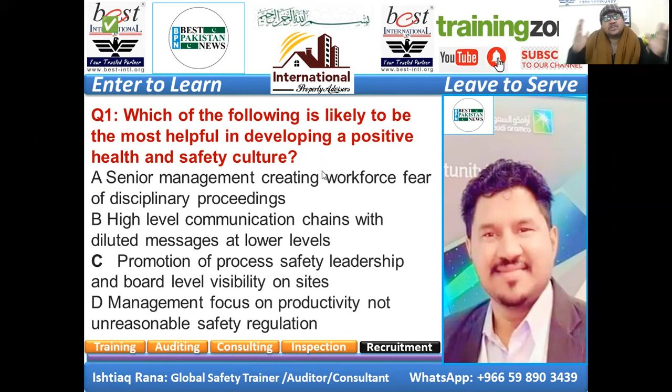Now let's take another example, question number 2. Since it's a mock exam, it gives an idea how that exam would look like. Question number 2 is, process safety involves a commitment to continuous what? Impartiality? No, it doesn't look sound. Improvement? Yes, we can think about it. Improvisation or implementation? The biggest room in the world is the room for further improvement.

So the ultimate purpose of process safety involves a commitment to continuous improvement. It's not like today everything is good and next day it's all bad. Or overnight you improved 70% your process safety, but very next day it came down to 20%. So it's not like that, it's a continuous, effective, continuous improvement process.

The improvement process is, today you are at 5%, then 7, 9, 11, 20, 22, 25, and you're maintaining, right? And this is how you go and keep your continuous improvement process on a daily basis, inshallah. So that is the ultimate purpose of this process safety management system.

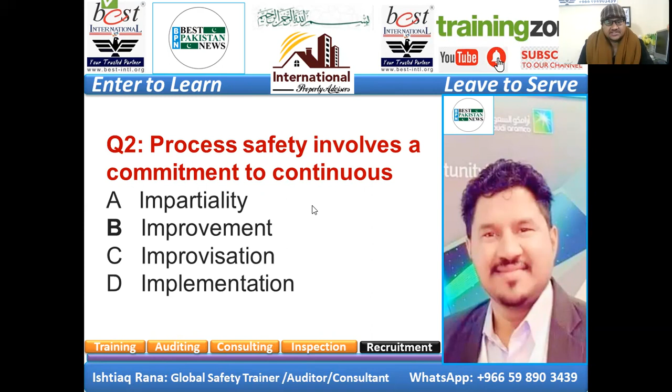Let's take another example. Question number 3, which of the following best describes workplace consultation? Now, we have communication and we have consultation. We have informing someone or consulting someone. So they're giving 4 options. Option A is two-way exchange of information between employer and worker. Yes, that's kind of consultation, because you have to exchange information as an employer along with your workers, right? So A is the right option.

Now I'm just going to talk about the right option, inshallah, so we can save some time. Ultimately, time is money, right?

Question number 4, what is the main reason for sharing lessons learned from major incidents with other organizations? The right option is C, accident investigations are more effective in determining immediate and root causes, so that we can take corrective preventive actions and avoid any repetition of such incidents in future, God forbid.

Question number 5, the key elements of process safety management follow the plan, do, check, act model, PDCA, as per international standards. Whenever we talk about management standards, PDCA is a foundational tool, plan, do, check, act model will be integrated with that management concept. Now, the management review aligns with which part of the model? Act, because management review relates to act, like plan, do, check, act.

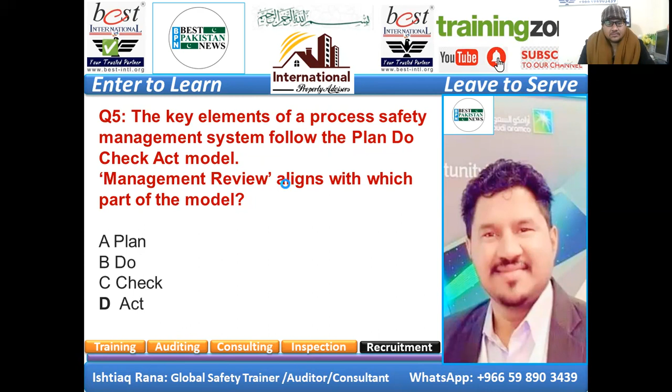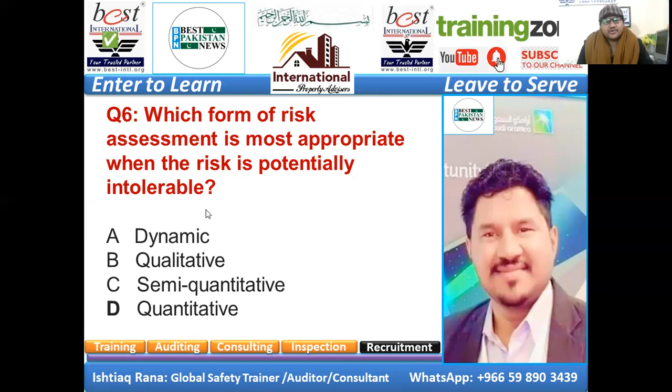Question number 6, which form of risk assessment is most appropriate when the risk is potentially intolerable? So we have to do quantitative risk assessment here. We can't rely only on qualitative.

Question number 7, which of the following is a leading indicator? In advance, you are getting data and defining your safety indicators, like through your safety audits. Of course, in advance, proactively, you'll be getting plenty of insights on what areas need to be focused on and how you're going to improve, right? So A is the right option.

Question number 8, which of the following is most likely to help you develop a safe system of work? You do task analysis, actually, not data analysis or causal analysis or statistical analysis. All analysis, of course, have plenty of benefits. But when we talk about process safety, it's a game of each task, each activity, each step of that particular process or sub-process. You have to take it seriously, because one small mistake and it's all over. So, task analysis.

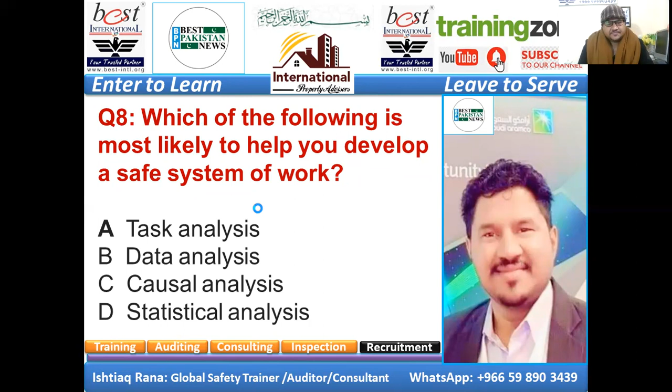Question number 9: a permit to work is usually required in preparation for an activity with high risk. Mostly, the permit to work system needs to be designed, applied, and implemented, especially to control high risk activities or processes.

Question number 10: the main reason why a shift handover should be given as much time as necessary is to allow for option B, an incoming operator to ask questions about the status of the process and an outgoing operator to clarify and explain. On rig sites there are normally 2 shifts, but there could be 3 also. So whenever you hand over your shift, the incoming operator should ask plenty of questions and clarify what went wrong, what was okay, and any complicated processes or contractual works going on.

Anything related to that particular shift needs to be communicated as output to the upcoming or incoming operator.

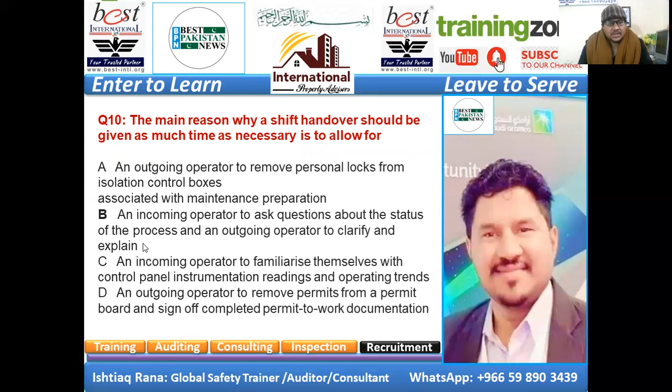Question number 11: inspecting a workplace where contract workers are carrying out work is performance monitoring. It's quite straightforward - it's not active monitoring, not reactive monitoring, not condition monitoring. This is called performance monitoring, because you awarded them the contract and they are working on your behalf, serving you basically, so you surely need to monitor their performance here. So D is the right option.

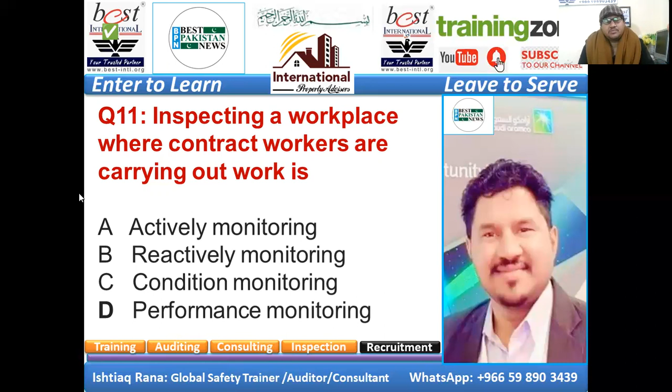Question number 12: maintenance work is planned on plant A. Understand the deep meaning of this question technically - maintenance work is planned on plant A, and the work is likely to impact on the operation of a second plant B. What is the most effective way of controlling risk between the two plants in this situation?

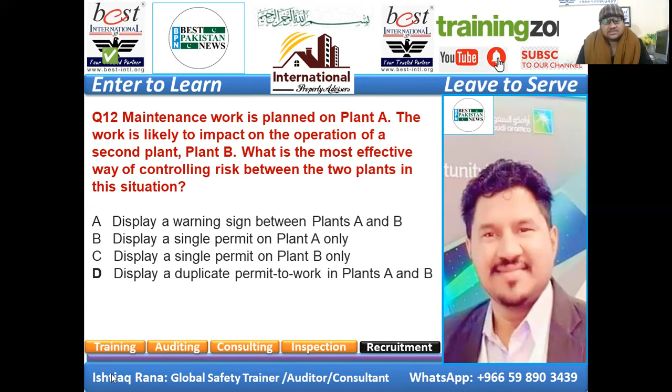Maintenance work is planned on plant A, and the work is likely to impact on the operation of a second plant B. So what is the most effective way of controlling risk between the two plants in this situation? The much better approach is to display a duplicate permit to work in plants A and B. So D is the right option.

Question number 13: what is normally included in the periodic review of the safety performance of contractors working on site? What is the real answer - how periodically we have to do inspection to check compliance and accident review meetings.

This is the best way - you inspect and check compliance as per your standards, as per legal regulations, as per process industry standards for that particular process, since you're getting services from your contractor. So this is the best strategy: inspections to check compliance and accident review meetings.

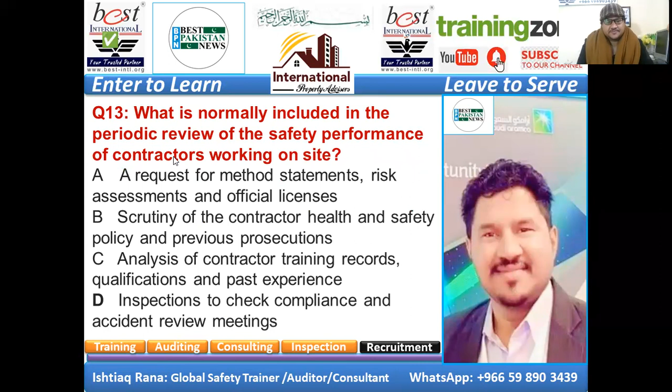Question number 14: maintenance of bunds primarily contributes to what? Emergency preparedness. Maintenance of bunds primarily contributes to emergency preparedness. In advance, you are getting ready and making sure that if anything still goes wrong, these bunds definitely will be a great contributor to keep you secure.

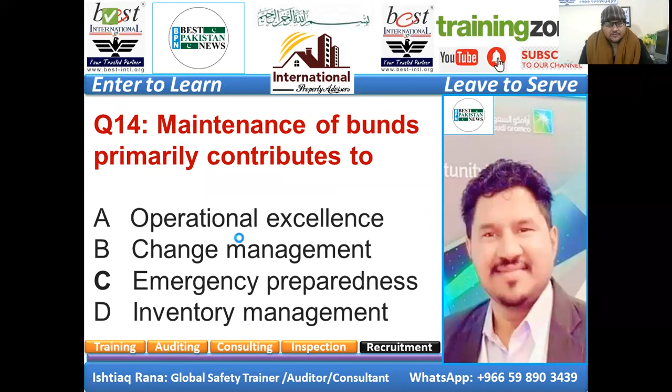Question number 15: a process was shut down automatically due to an unexpected and sudden pressure increase, outside of standard operating conditions. What type of shutdown is that an example of? A process was shut down automatically - a sudden shutdown due to an unexpected and sudden pressure increase, outside of standard operating conditions.

Outside of SOC, standard operating conditions. So what type of shutdown is that an example of? Of course, it's an emergency shutdown. So D is the right answer.

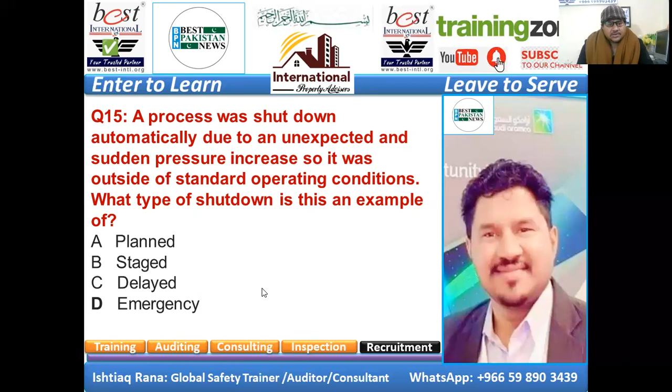Question number 16: safe operating envelope, SOE, involves adhering to what? Upper and lower operating limits. There are of course process parameters for each process, several of them, so make sure the upper and lower operating limits are well followed. Like if you go and see the oil refineries or gas oil separation plants, or any high hazardous industries, see how that plant is being controlled.

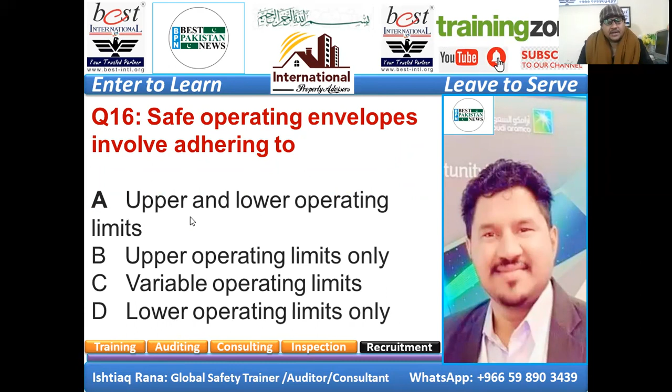There are plenty of upper and lower operating limits which need to be followed process to process, to control that plant and avoid any sort of abnormal or emergency situations. So this safe operating envelope involves adhering to upper and lower operating limits. So A is the right answer.

Question number 17: pressure, temperature, flow, level, pH, and density are common parameters associated with safe operating envelopes, as I mentioned earlier. So C is the right answer.

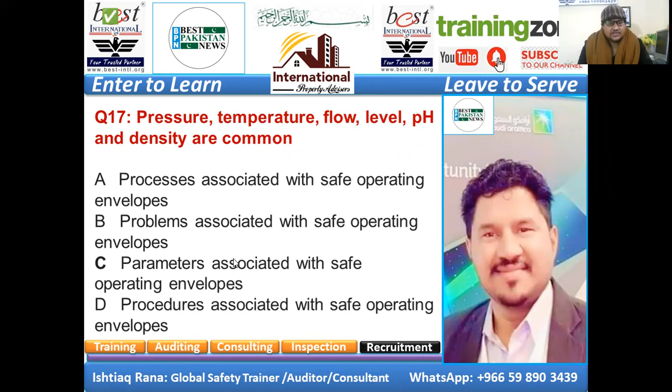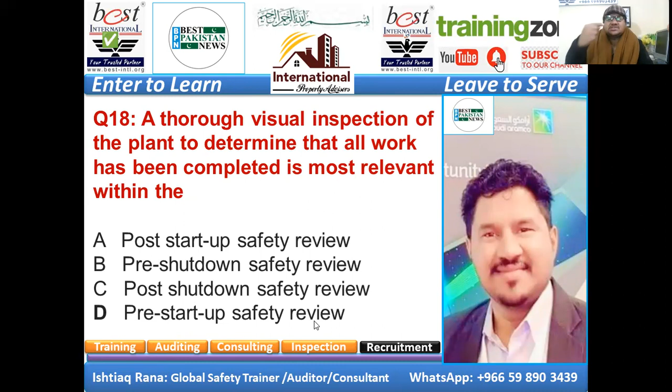Question number 18: a thorough visual inspection of the plant to determine that all work has been completed is most relevant within the pre-startup safety review. Proactively, you need to check it out.

Question number 19: saturated steam is also known as wet steam. Saturated steam is also known as wet steam.

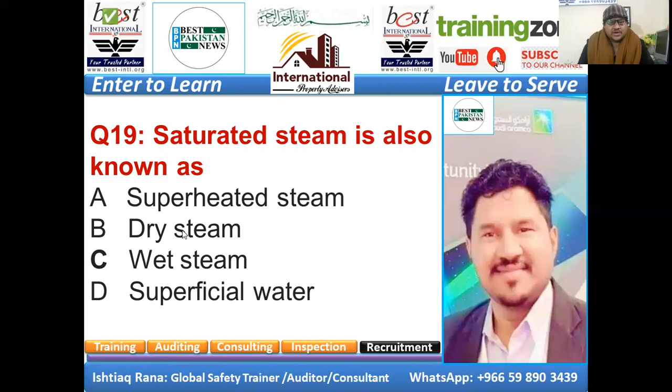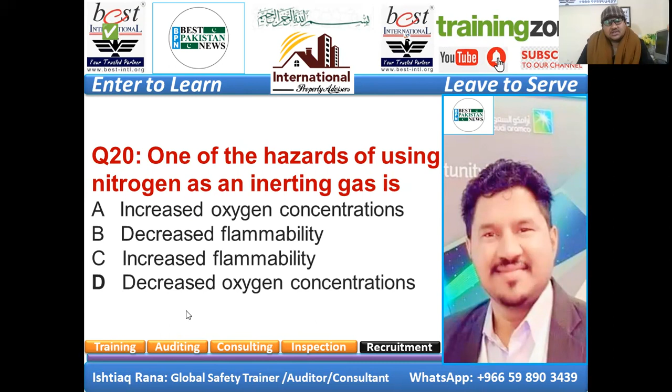Now, question number 20: one of the hazards of using nitrogen as an inerting gas is decreasing oxygen concentration. Even though for purging we use nitrogen to minimize and bring the LEL, lower explosive limit, to 0%, we rely on nitrogen after steaming, water wash, or other processes. But ultimately, bear in mind, it will also decrease or bring down the oxygen concentration.

Now, question number 21: a consequence of a thermal runaway reaction is catastrophic plant failure through overpressure. Because the thermal runaway reaction is there, it booms up due to overpressure. Question 22: liquid is being transferred from a road tanker to a storage vessel. The failure to open a vent valve on the tanker during transfer could result in tanker overpressure, of course.

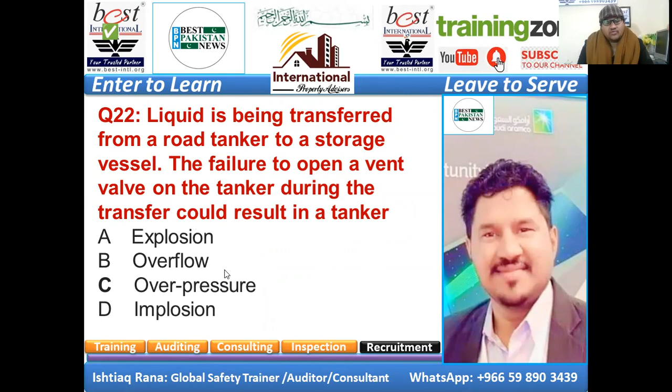So what is the right option? Option C. Now question 23: rapid temperature change can cause cracking of materials. This type of failure mode is known as thermal shock. So option C is correct.

I hope you got the point.

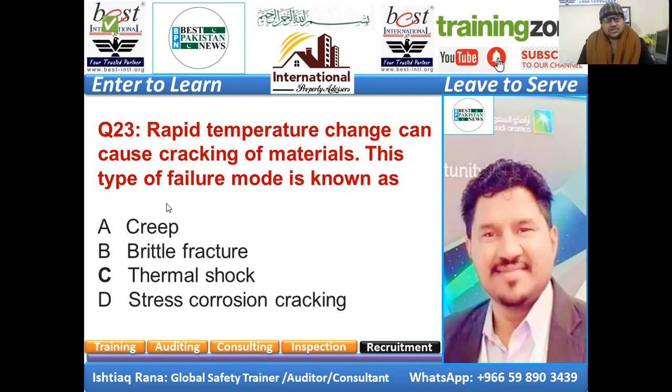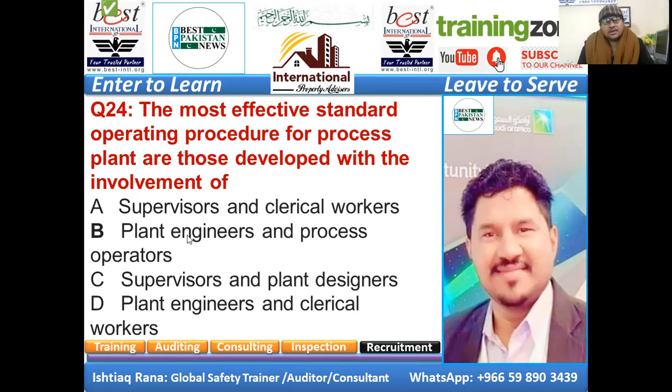Now, question 24: the most effective standard operating procedures for process plants are those developed with the involvement of plant engineers and process operators. Because they are process engineers, you can get their technical input, and based on that, you can prepare standard operating procedures, or SOPs.

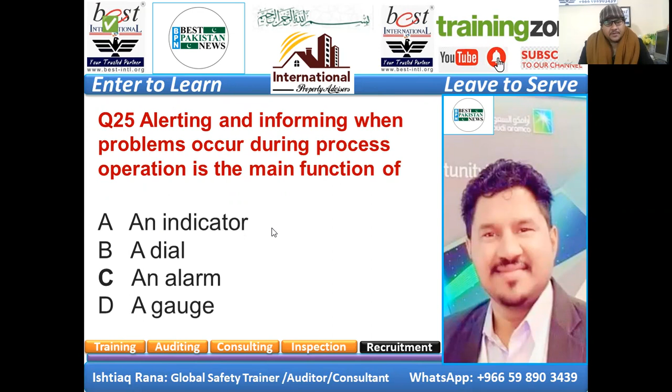Alerting and informing when problems occur during process operation is the main function of an alarm. There must be an alarm system, and I hope you guys have a clear understanding about it.

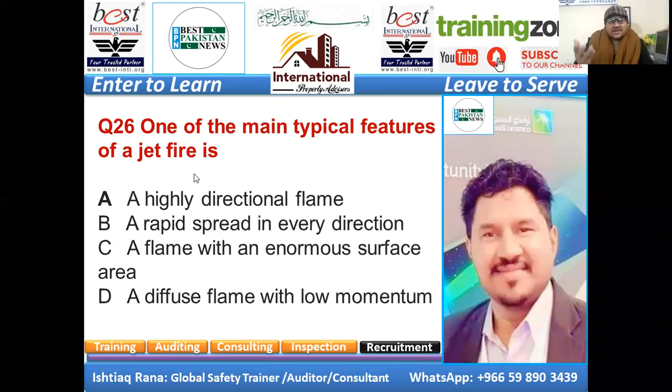Now, question 26: one of the main typical features of a jet fire is a highly directional flame. There are different types of fires, but you can go and research what a jet fire looks like—what is that directional flame? Option A is the right one.

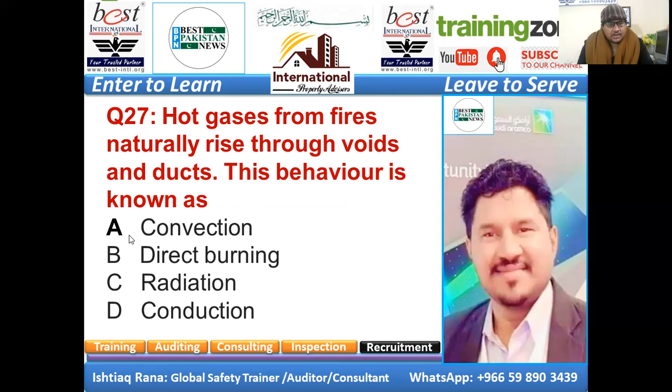Hot gases from fires naturally rise through voids and ducts. This behavior is known as convection, not conduction. Different fire-spreading methodologies exist, so no harm in learning further. So for question 27, the right answer is A.

Question 28: to manage an organization's reputation during emergencies, there should be a nominated, trained person to speak with media reporters. It's not like anyone can report and talk to the media—make sure of that, because ultimately the value of your business's goodwill is what matters. If you say anything nonsense about your company in front of media, they'll catch this issue and spread it like a wildfire, rapid fire.

Within 4 minutes, the message goes globally and it's all over. Because once goodwill is gone, that means the business is over—God forbid. That's why several companies have a corporate communication department, and within that department, they have someone solely responsible for talking with media persons.

Now, question 29: for which operating environment is ATEX-approved equipment essential? We have fireproof, explosion proof, fire resistant material—same way, ATEX approved equipment is essential. What's the benefit? It's for potentially flammable atmospheres from dust or vapors. Wherever we believe potentially flammable atmospheres are present, ATEX approved equipment is essential, imperative, and important to use.

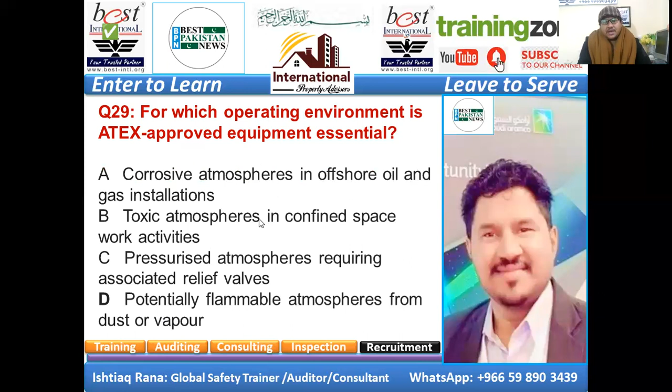Question number 30: which of the following is an example of a condition needed for a dust explosion to occur? Dust confined in a hopper or silo—so be careful. Confined spaces are always dangerous, restricted, kind of red zone areas.

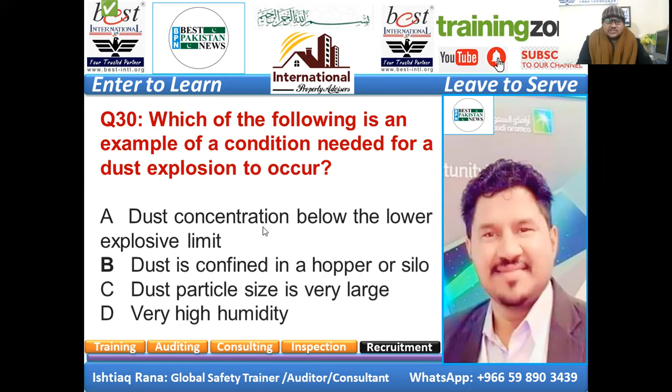Question number 31. You are trying to convince your board to adopt a safety management system. You are using an argument that a safety management system can help you avoid needless and preventable deaths and injuries. What type of argument is this usually known as?

It's a moral argument, because we are responsible morally, legally, and also because of financial insights, we truly need a safety management system.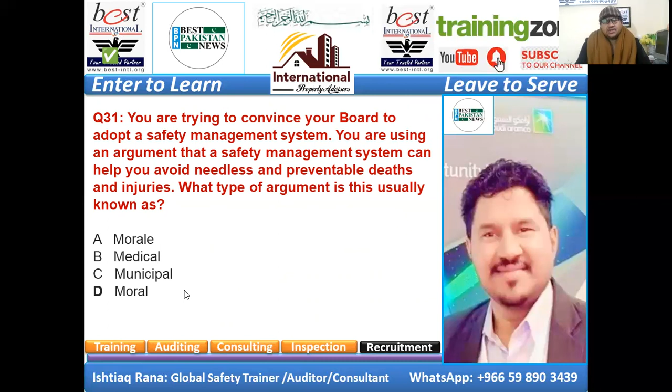So it's a zone 1. What is zone 1? What is zone 2? What is zone 21 and zone 22? No harm to learn further.

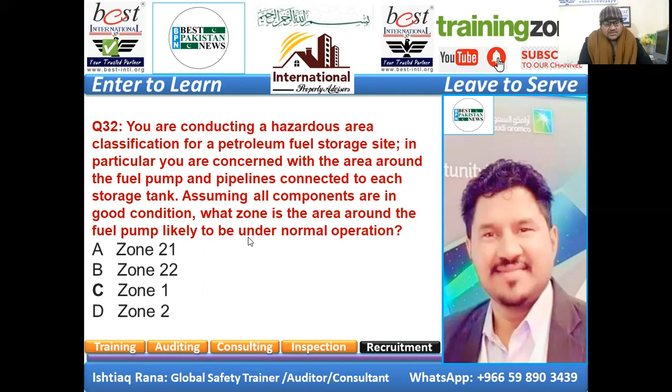Now, question 33, a chemical plant located 4 kilometers from a city center accidentally released a very large quantity of toxic gas. The release occurred when a process operator mistakenly added water to a storage tank containing a toxic liquid. The two reacted violently, causing the contents to boil. The reaction that occurred within the storage tank was one that released energy with a corresponding temperature increase.

So B is the right answer. You can read again and again and understand, and don't go to question number 34 until you understand question 33 and why that option B is the right answer.

Clear your why. So take your time, because that's why I mentioned, don't watch this video if you don't have time. Because whenever we want to learn something, we need complete focus, right? Not the distracted mind. I know we all are so much busy, but once we are doing something beneficial for our career, we must have focus, dedicated time and energy.

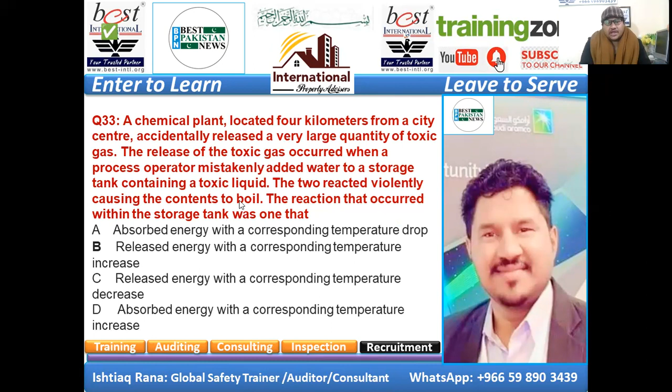And no doubt there is a pool of information, and now pulling out or even selecting the right set of information which can be more helpful for us, it's really hard. That is why I'm telling, make sure whenever you're watching this video, you have plenty of time to focus, and then see the benefits, inshallah.

Question number 34, an accident report detailed that similar plants owned by the same organization in other international locations were built downwind of cities. This was as a result of previous incidents where smaller quantities of toxic gas had been released into the atmosphere. This chemical plant was built upwind of a city.

This was primarily an example of a failure of organizational learning, because we have to learn from our incidents or accidents.

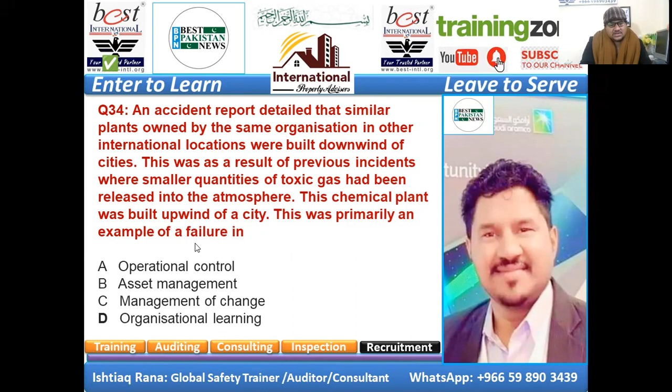Now, question 35. During a major incident, the primary plant audible warning system was activated, but management subsequently issued an instruction to switch it off shortly after.

Switching the primary plant audible warning system off in these circumstances was primarily a deviation from a SOP, a standard operating procedure. So D is the right answer.

But to be very honest, sometimes as a safety auditor, when I evaluate the SOPs, they are not technically sound. Several steps are missed, or maybe not updated as per the latest research and trends, to manage complicated technical hazardous processes.

So make sure you have periodical review of your SOPs to keep them updated. Like if an SOP guides you through 12 steps for a particular process, but your operator is following 16, those four extra steps are not enlisted in the SOP. So accept the fact your SOP is not updated, because those four steps are technically very important - that is why you are getting the right set of output from that process.

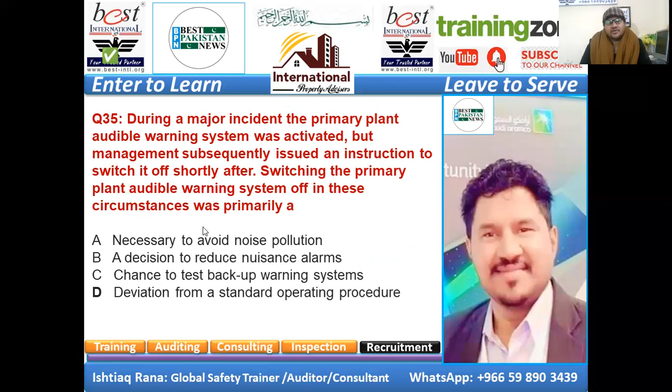So I hope you got the point. All your SOPs, your policies, your documentation, everything needs to be reviewed and make sure you keep them updated.

Question number 36, you are working on a site that handles combustible dust, a kind of flammable dust. You have already taken precautions to reduce the chances of a primary dust explosion. However, you are worried about the risk of a secondary explosion, which is the best way to reduce the risk?

Good housekeeping. We sometimes underestimate these two words, good housekeeping. Housekeeping of all hidden areas - don't let any combustible dust accumulate, especially in hidden areas. So deep cleaning is very much important.

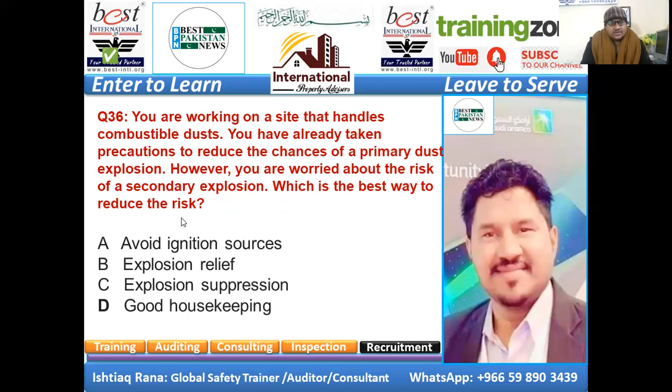Question 37. A bulk fuel tank is normally filled automatically from a pipeline through a filling valve. The tank is fitted with a level gauge that enables operators to remotely monitor the level from a control room. The tank is also fitted with a high level alarm.

There's also a high level switch, which if activated, closes the filling valve. The filling valve can also be closed using an emergency switch located in the control room.

On one occasion, all of these devices failed and the tank overflowed. While all of these devices help prevent overfilling, which is the most safety critical item required to effectively prevent the tank overflowing? The filling valve - option D is the right answer.

So you can read this again and again, and don't move on to question 38 until you understand the scenario and why option D is the right one.

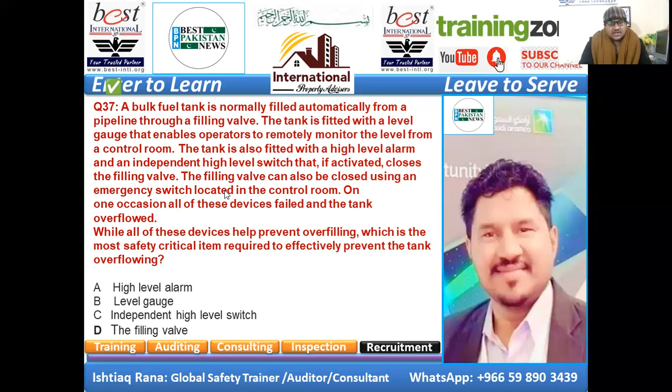Question 38. Several workers were killed by fire and explosion after a worker cut into the wrong pipe. The pipe contained flammable hydrocarbons and had not been isolated. The release was ignited by sparks generated during the cutting operation. You are the process safety representative investigating the accident. What is the most significant cause of this accident?

It's actually failure to control work. It's a clear, straightforward answer - C, failure to control work.